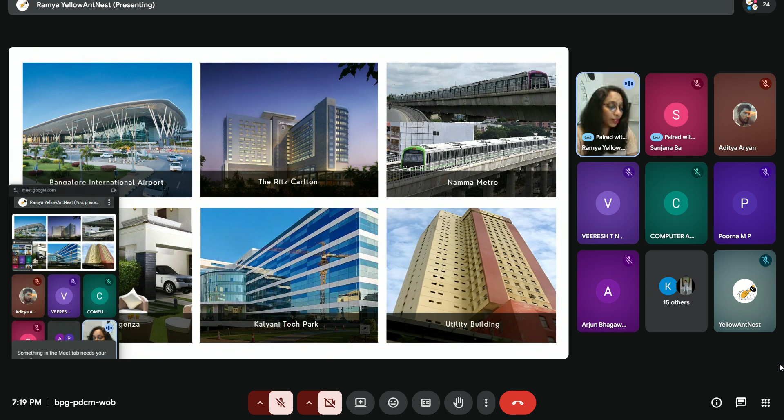Coming to today's workshop, this is mainly about how your drawings can speak more at the site, and also how to produce more professional drawings without errors, making the drawings more understandable for the people using them at the site. That is the main motive of this workshop.

This is the second part of the workshop which we conducted the previous month, in December. We had covered topics like initial drafting settings, where you can do a set of adjustments in AutoCAD which will make your drafting speed very high. Other things covered were how to start with professional floor plans, how to give dimensions in your working drawings, and how to start working on elevation sections and the electrical layout.

Excuse me, ma'am. Yes, tell me. Ma'am, can you close your meeting window? It's on the bottom left. If you can just cancel it, it's overlapping with the presentation. Okay, now. Yes, ma'am. Thank you. One second. Is it clear now? Yes, ma'am. Okay, fine. So the plumbing drawings.

Before we start the plumbing drawings, can I quickly get a few introductions on how many architects or civil engineers are here, so that I can explain in that perspective? Can you unmute and tell me one by one? I am a civil engineer, ma'am. Any architecture students, fresh architects? Ma'am, I am an architecture and interior design student. You are a student? Yeah. Good evening, ma'am. I'm a fresh graduate and I'm working in a firm. Okay, architect, great.

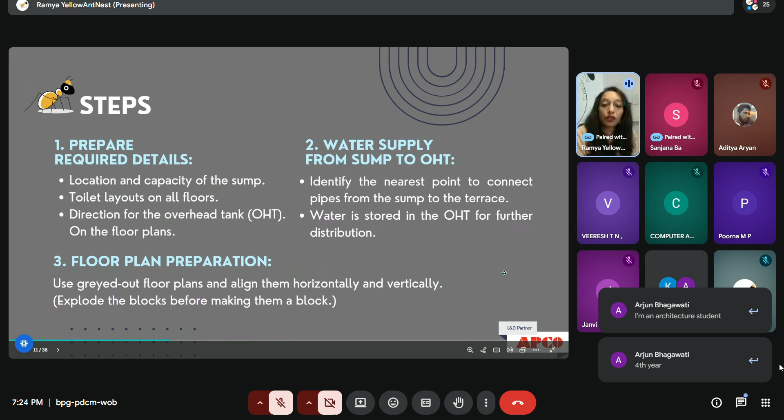Meanwhile, we'll continue with the plumbing layout. In the plumbing layout, the drawing is prepared to tell the workers at the site how to lay the pipes, in which direction, how many inlets and outlets should be provided, where the water has to be taken out, and from where the water has to be taken in to the entire building and individual toilets, kitchen, and utility. We are mainly concentrating on the residential layout right now because that is what we can cover in this workshop.

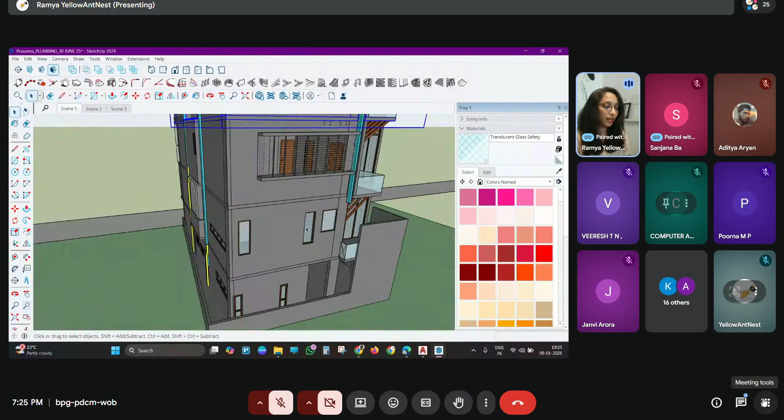So we are taking a small example of this villa. This is a 4 BHK villa, and we have around 4 toilets, one kitchen and utility. As you see here, we have the overhead tank on the last slab, and from here I have to plan the pipes going to all the toilets in the structure. Here I have one toilet, one toilet here, the kitchen in this corner, and here I have the utility. In the ground floor I have two toilets.

Based on this, you have to divide your outlets from your water tanks. To get the water to your house, you have to see where you have the water connection from your main road, where you can take the water inside with the water meter.

Any questions, guys? Meenal, you have unmuted. Do you have anything to ask, Meenal? Hello?

Okay. So after you take the water to your overhead tank, from there you have to distribute it and take the water down in all directions. Usually when you plan, people provide toilets one above the other because of this reason. Here in the basement you will have a sump, and there is a small thumb rule for locating the sump: it shouldn't be very close to your column or the column foundation. Keep it at least 1.5 feet away from the columns, and it can come under the parking or sometimes under the bedroom also.

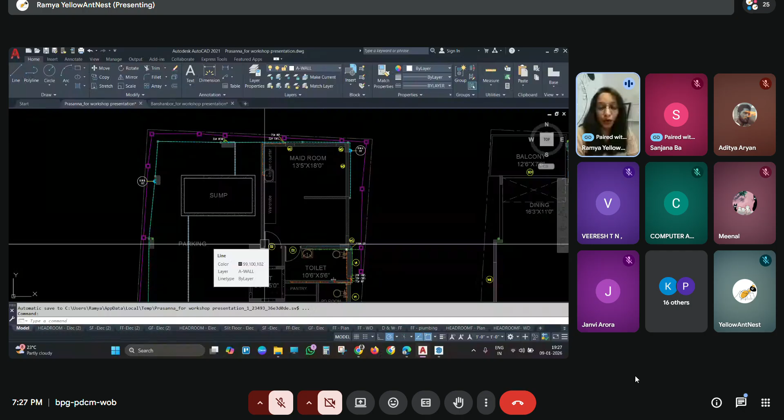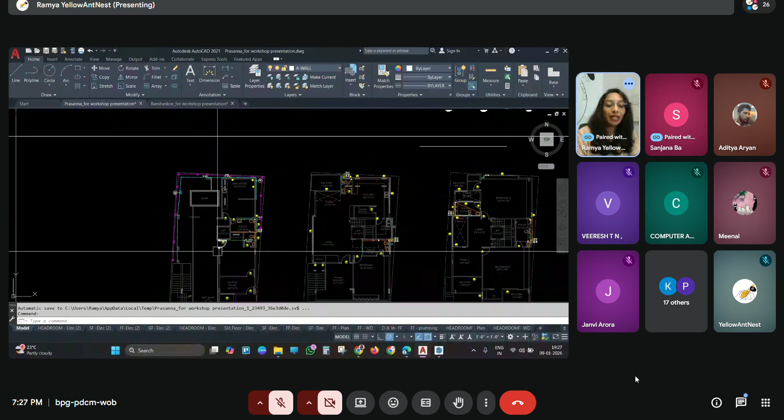The pipelines go below the plinth, so you need not worry about what activities are coming here. According to that, you can plan your sump location. The only thing is that it shouldn't be very close to any column foundation. From here, you can decide in which direction you want to take the water to your overhead tank. From the sump it comes directly here. At the overhead tank, here we have two water tanks.

One is for the regular storage and one is for the solar. So what we have decided is, from here, we have to show the arrows in which direction the water actually flows. So behind the column, we have made a provision from where the water is pulled on to the top last slab. So it will come here, then we have taken bends and it reaches your overhead tank.

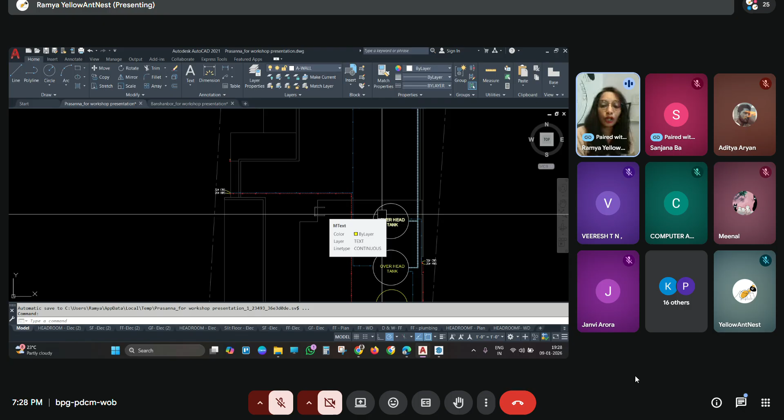So people also decide on the location of overhead tanks as per Vastu, that is usually towards southwest. So towards the southwest, they keep the water tanks, and they provide the distribution from that location, and as per Vastu that should be the highest location also, so that will also help you to distribute from there to all other locations, all other rooms, that is toilets, kitchen, everything. So from here, it is again divided.

So before you come to the 2D drawing, what we would recommend is to start with the small rectangular blocks and decide where all you need the pipelines that have to come to your toilets. So for example, you have the pipe running here, and if you have any disturbance, like a column, a beam, or a window coming there, what you will have to do is take a small deviation, and then you can continue taking the water down. So this will help you to locate exactly in that particular floor where the pipe location has to be provided.

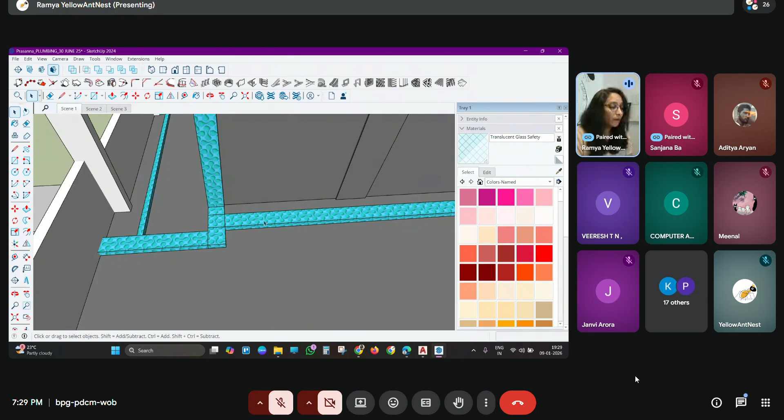So once you complete this, how you are distributing. So for example, if you have the water outlets in two directions, they use the T joinery to distribute the water, and according to that, the inflow will be decided. So for this particular toilet, we are taking the water inside from here in this location. So as per this, you will update your floor plans showing where your water inlets are starting from.

It is a little stuck.

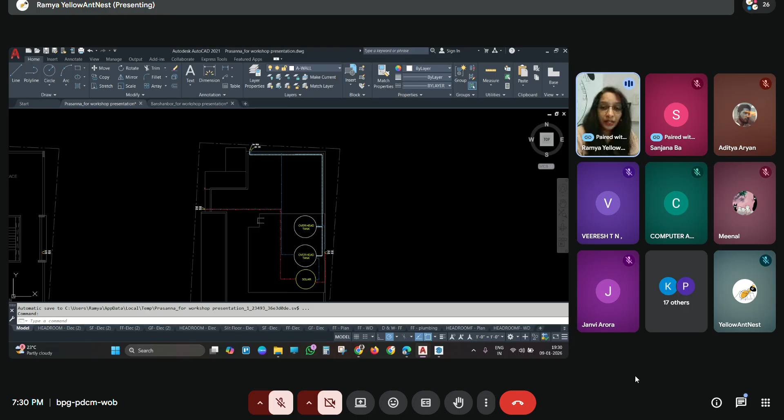So after you decide that, you can start with layouts in the toilet. That is, where your water heaters are coming, where your WC, where your wash basins are coming, where the shower heads have to be placed. So plan your shower heads, WC, and all these things in the toilet. And then once you get the points where the pipes are coming, according to that, you can show from where the pipes have to be taken inside. So this blue color represents the cold water distribution, and this red color with HW represents the hot water distribution.

So the first step is taking the water inside the plot. Wherever you have the nearby water connection, from there you are going to draw the lines into your sump tank, and from there you will show the water flowing upwards towards the overhead tank. From there you are again distributing the water downwards to the toilets, kitchen, and utility. And here you are going to show each connection going to all the fixtures in the toilet. It can be a tap, WC, health faucet, the wash basin, water heaters. So for all these fixtures, you have to show the points and the pipes running individually.

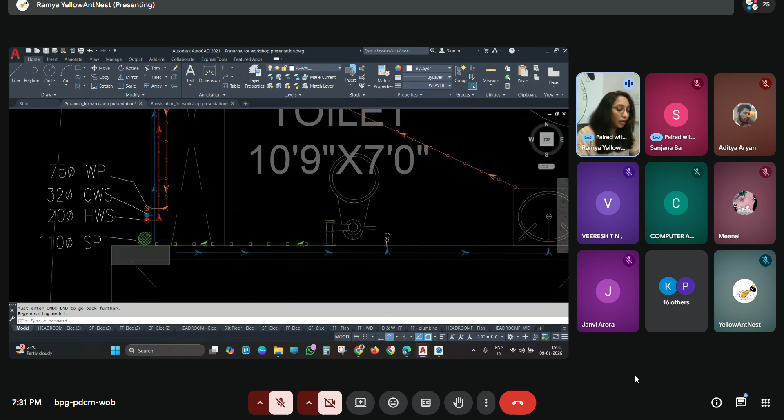And from here, again, you have to decide how the wastewater is taken out of the construction. So the first point is to decide where your nahani traps are going to come. The best recommendation is to give the nahani trap right next to your shower head and your WC, because you're not letting the water flow a long distance before you drain it. So it is always best to provide your drains close to the shower heads, or where spillage of water is possible. So in those places it is recommended to provide the nahani traps.

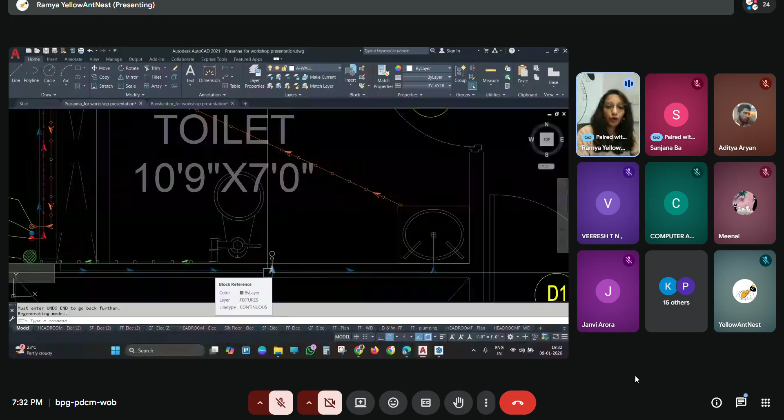People generally go for a maximum of two in one toilet. Otherwise it can be kept at just one location, where your wash basin water outlet is also connected directly to your nahani trap. So how you are going to distribute all these internal lines: one option is you can take all the pipes running below the slab and cover it with the false ceiling, UPVC or the PVC false ceiling, which is available in the market right now.

Or you can actually raise the slab or take a sunken slab and lay all your pipes. And as you see here, this cross pipe is going below the slab. I mean, we have taken a sunken slab. Just above the slab you are going to place the piping, and you are going to fill it with cinder and then do your flooring.

The only difference is that when you take the pipelines below the slab, it will help you with further maintenance. It will be very easy for you. When it is covered with a false ceiling, they will open a small panel in between, and they can do the required repairs or the connections. If there is any small water leakage, it will be very easy for maintenance.

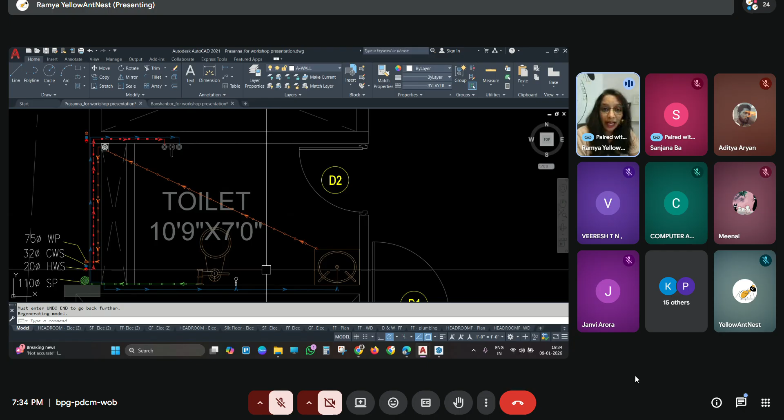But if you are going to place these pipes inside the flooring, fill it up with cinder, and after that cover it with the tiles, then if there is any leakage, maybe after 10 to 15 years it will start showing up in your walls, in your doors. The walls become damp, the water droplets will damage all the paint, and the tiles can start showing cracks. The flooring and walls remain wet during the rainy season. Even in summer, if the leakage is high, it doesn't dry at all.

So the maintenance becomes very high if you go for the sunken slab system, which has been followed for many years in the industry, but now it is not really recommended if you are looking for longer durability of the structure. So it is always recommended to take your pipes, do a core cutting in the slab, and put the nahani trap. Below the slab, you can start connecting all the pipes, and in one go you can take the pipe outside.

If you do not prefer to go for core cutting, you can give a dummy pipe before you pour the concrete when you are laying the slab. If you have all the drawings ready, prepare one dummy pipe filled with a brick or a cloth or something, place it where you want to take the water outside, and then pour the concrete. Once the concrete is set, this opening will be used to run all your pipes, and then it will be sealed with concrete or with waterproofing elements. It becomes very easy to run the pipes, especially when you have beams and slab there.

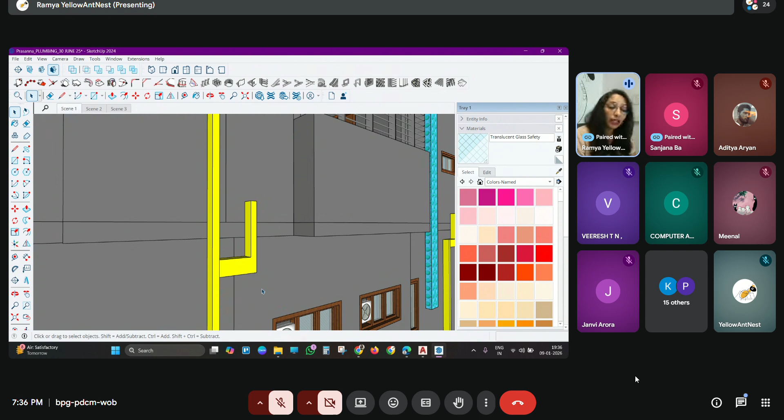The only thing is, during the design stage, you have to make sure these are maintained. If you have a toilet coming above the dining or a foyer, since designers usually do not strictly follow that a toilet has to come above a toilet, you can cover it up with a false ceiling or other design elements, which can be opened for repair work and then closed again. So this is one option.

Once you lay all your pipes, you are going to show how the water is flowing outside. For example, in this toilet, we are getting cold water to the wash basin, to the WC here, and the shower head here. Through this drain, your soil water is taken out. The orange line shows the water flow, along with the dia of the pipe. For solid waste, green or yellow lines are shown in plumbing drawings in general. These are taken down, and in the ground floor you show the manholes at every 20 feet.

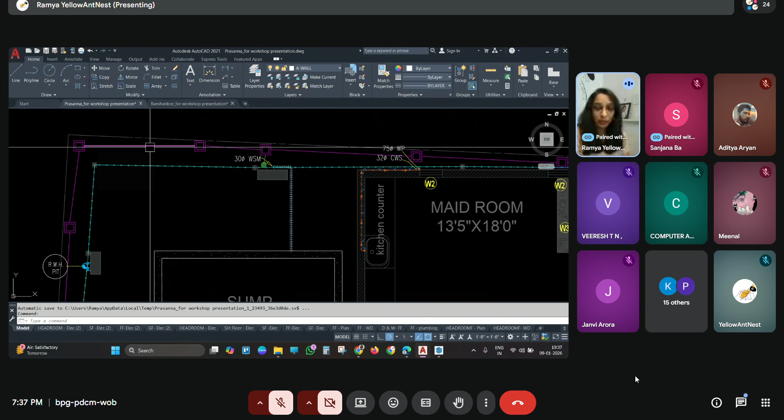For example, if you have a manhole here, consider a minimum of 10 feet in both directions, and altogether it comes to 20 feet. It is preferred to give 20 feet of distance between your manholes. If you are concerned about having these manholes all around the structure, plan your toilets on one side of the building, which is a little difficult, but with limited requirements it is 100% possible. So check that and plan during the design. Consider these points, which will make your services much easier.

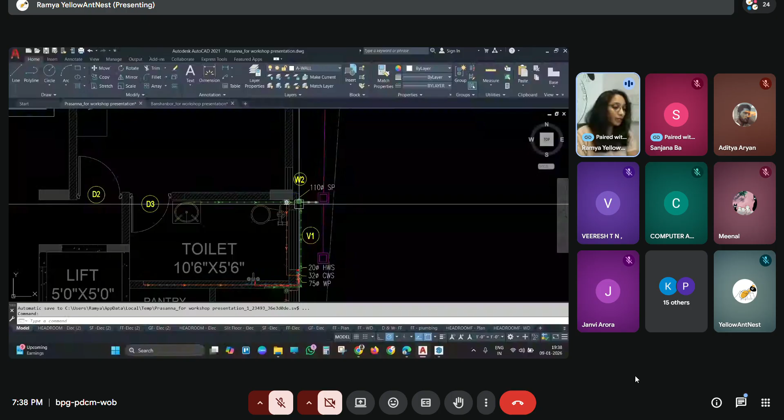So as you see here, I have taken all the points. So for example, I'll show you one. So here I have this point, I have the soil waste pipe, this is the liquid waste, this is cold water inlet and hot water inlet. I'm going to copy this, take a common point here and paste it here. So this will tell you exactly where it is coming. So it is coming in this location in the same place.

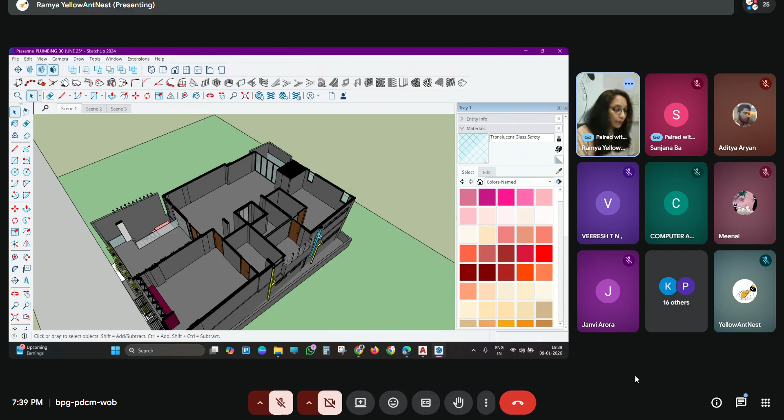But if you are shifting in any of the floor plans, I would recommend you to take a section in this, take a section and then you can export it. You can export it, and here you will know exactly where your outlets are coming. So according to this reference, you can use in all the floors and show where the water is taken inside and outside.

So we'll quickly refer our, so as I told you, the location and the capacity of the sump depending on number of people, or depending on number of residents, or the location where you have water scarcity, then you will have to go for more storage. If you do not need so much of storage, then you might not need a bigger sump tank.

And even in building a sump tank, you have two to three types of sump tanks which you can go for. One is the ready to install sumps, the second one is the RCC, the reinforced sumps. So depending on the site location, you can give these options to your clients. And then is to identify the nearest point from where you can connect this sump tank to your overhead tank, and from there how it is distributed.

So we discussed this, and these are the few things which you will have to remember. That is the hot water, we can usually go for 3/4 inch or 1 inch. These days if you are using a pressure pump or a heat pump, we would recommend to go for 1 inch for both hot water and cold water. Wastewater can go up to like 2.5 to 3 inches, and sewage water compulsory you will have to go for 6 inches.

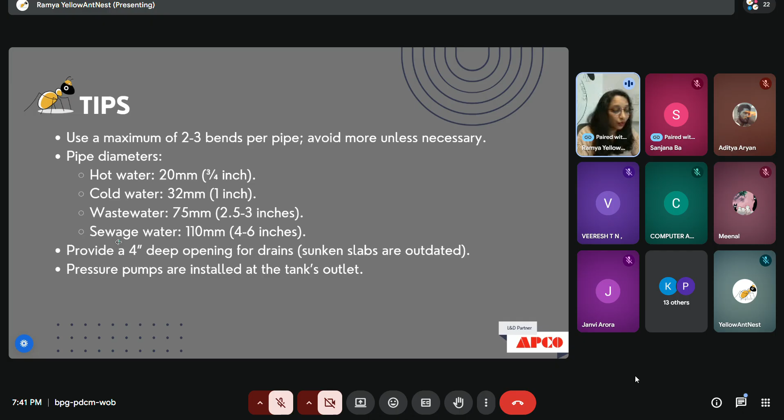Any questions here? If you have any questions, you can ask.

Some wastewater pipe also in every bathroom? Wastewater pipe we have to provide in every toilet? The wastewater pipe, sorry, come again. Wastewater pipe has to be provided in every toilet, yes. Okay. Because you will have the nahani traps, you will have the solid waste in all. So you will have to provide the wastewater in kitchen and utility also. So wherever you are taking the water inside, everywhere you have to give the outlet.

Okay. Any other questions? Was it clear? Yes, ma'am. Okay, thank you.

So we'll go to the next topic, that is the door window details. So as we discussed in the last workshop, whoever has attended, we had recommended to create this kind of a block where it will help you to understand what are the heights of individual floors. If you're following with the same height in all the floors, it will not be a huge challenge. But if you're playing with different levels, you might feel very confused at what height your windows are coming or what is the maximum height of doors you can go for.

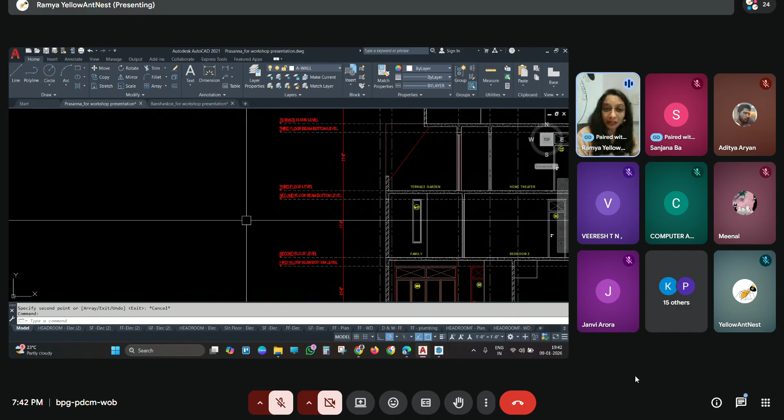So what we recommend is to start with the floor level. So from the floor level to whichever floor you are starting with, you have to find out what is the ceiling height, what is the beam height, and the thickness of your slab. So fix these heights. So then you can start with providing at what height you want to provide the windows.

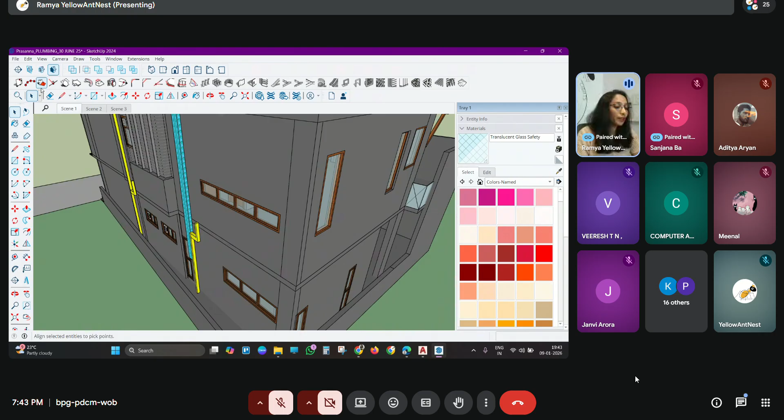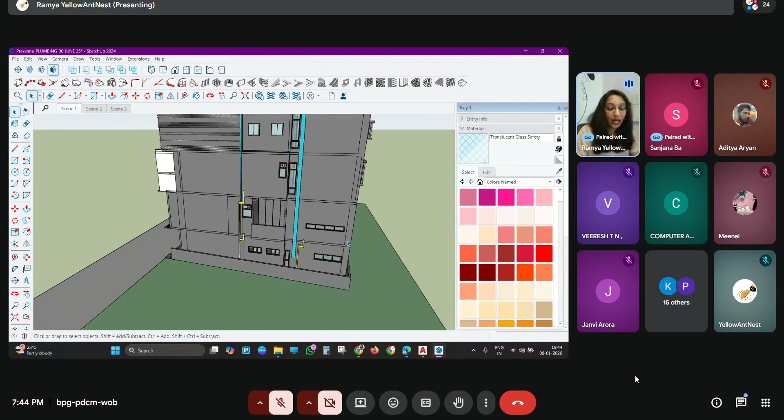So generally, as you see, depending on the room function or maybe depending on what kind of elevation you want to create, these windows are designed. Especially if you are planning with few complex solids, or if you are trying out different shapes, then understanding where the beam height is coming, or what should be the maximum width of the window, how much space is left. So what procedure we follow is complete all the window designs on your model first, and then you can take your floor plans, or take your windows and doors and start working on the detailed drawings.

So what we have done is, according to the elevation and the functionality, we usually provide a minimum of two windows in the bedrooms and one good big window in the toilet and living room, depending on what kind of theme our clients are looking for. According to that, we decide if we have to provide bigger windows, one big window, or smaller different windows.

So you decide how many types of windows you want to provide, and once you finalize everything in your 3D, then you have to start with each floor and name the windows in the working drawing first. Start with naming the windows, then start with the doors first, and then continue with the windows. So this is the ground floor window detail which you are looking at. Here we have started with the sliding doors. I'm showing the frame of the window.

So the important thing required at the construction site is to tell them what should be the width and the depth of the frames that you are going to use in the windows. For example, you can go for 5 by 3. If you're going for wooden windows especially, the client will be concerned about the span, how big the maximum span of the windows can go, up to 12 to 13 feet. More than that, if you provide wooden windows, there are chances that it bends over a period of time and your shutters might not sit properly.

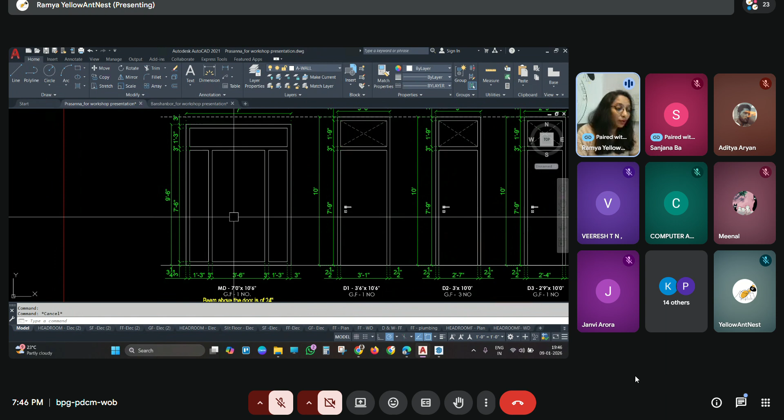So because of that, you have to give additional mullions or more dividers to reduce the span. All your creativity will come into picture here. So here you have to decide if the span is bigger. If you have a really huge window, you can go up to 5 by 7, 4 by 5. These are the common sizes you can get in the market for any wood.

If you're going for UPVC, then depending on the span, they can suggest the window frame size, or you can also ask saying that you're looking for sleeker windows where you want to display more glass and less border. If you have small windows, it is always better to go for the sleeker frame.

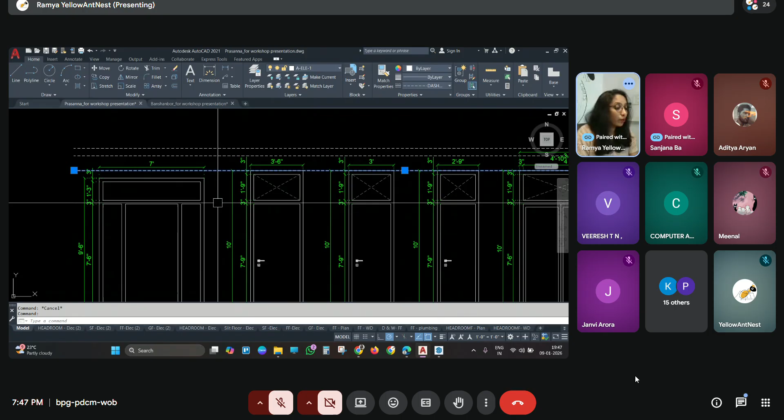So here you can start with showing till what height you want the window. I know the maximum height I can go is till the beam bottom height. So as soon as I start with the window drawing, I can decide the maximum height of any doors. The standard height we are going to take is a 7 to 7.5 feet opening. After that, you can make it a fixed glass, or you can keep the doors to only 7 feet. It depends on your design.

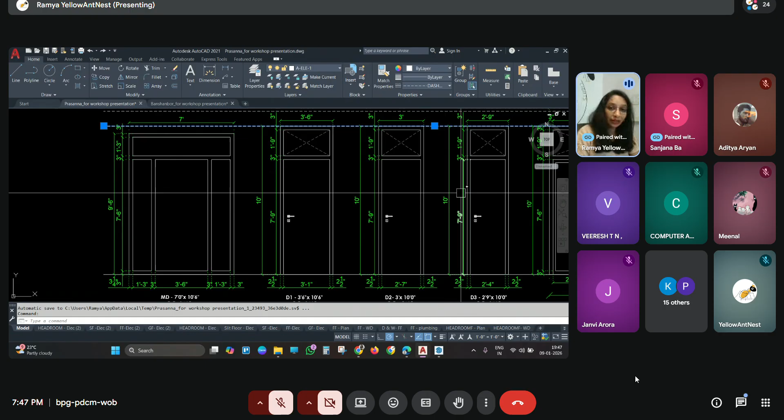After you provide all the drawings of the doors and windows, you have to start providing the dimensions of each frame and the mullions. Once you complete that, show the fixed glass or on which side the door has to open. For example, here if it is a sliding window, I will show the drawing with the arrow. This will represent a sliding door. And if it is a flush door, you can show which direction it has to open. This will represent a flush door.

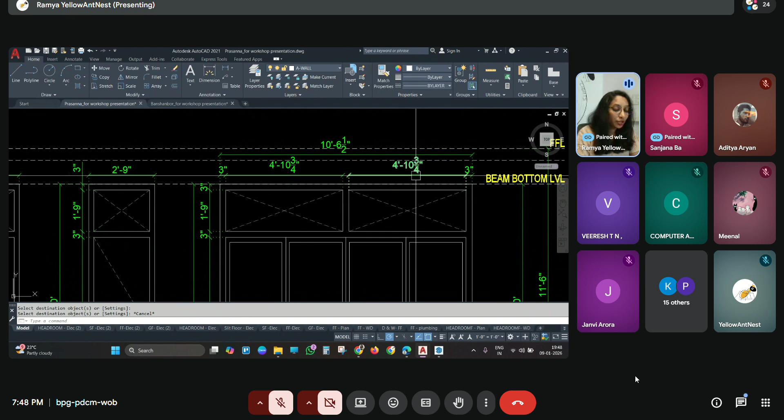Along with this, you have to show the complete end-to-end dimension, the complete width of the opening after the brick wall and plastering. That will become the entire span. Then your window frames will come into picture, and then your shutter frames. So you have to show individual divisions. For example, if you are giving 3 divisions or 2 divisions, mark them with the approximate dimensions you are going to create.

For the height, the main things you have to show are the sill height, window height, and the divisions you're going to give. If you're going for any special window, like a corner window, you will have to show the floor plan showing on which side it has to open and how much extrusion you have to take out of the window. For example, for a bay window, what should be the depth of the window after which you are going to place the window frames. To represent that, you will have to show the floor plan.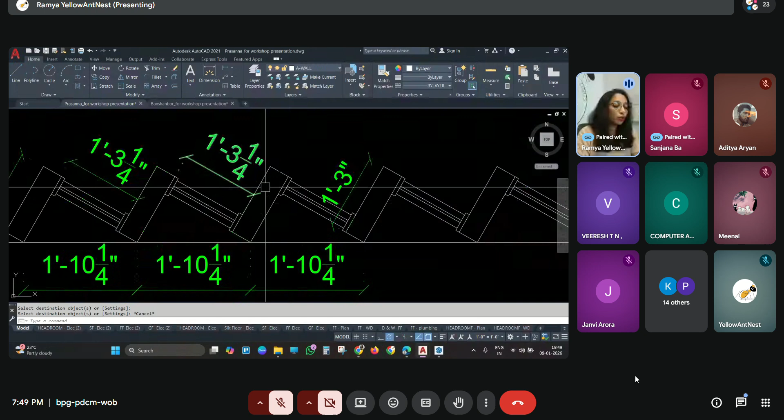So we have a solid plank. In between, we are going to place the frame where you can access, open or shut the window.

So these are the few things which you will have to consider: the sill height, the window height. You understand what is the sill height, right? From the floor level, how much height the window has to be placed - that becomes the sill height.

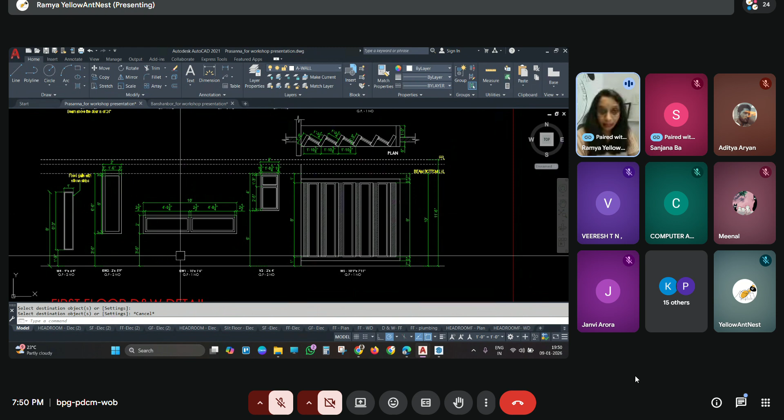Usually people prefer to have the lintel height, above that it will be completely covered. If you have to show a lintel, you can show it - usually lintel height will be provided at 7 feet or 8 feet. So here you can mention as lintel level, and all your windows will stop here at the lintel height. If you prefer to give additional windows above the lintel, you can show it from the lintel level also.

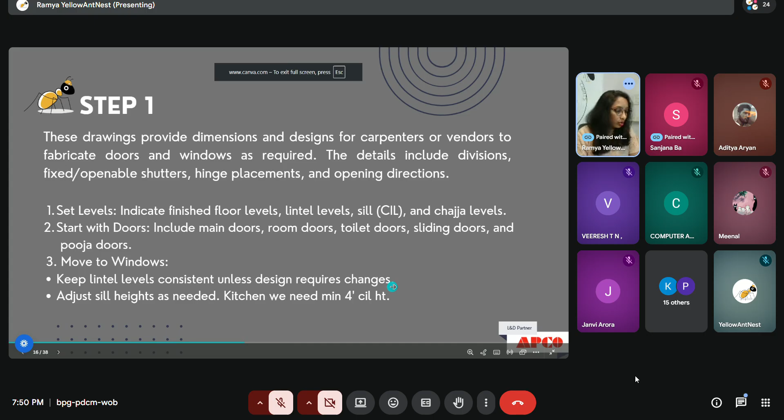So that is about creating the doors and window drawings. These are the few sizes which are available in the market, which I have mentioned. So that is about door window detail and the plumbing detail.

Any questions here? If you have any questions, please don't hesitate to ask. No questions? Anybody?

Okay, so we'll go for the staircase drawing. Staircase drawing is also very simple. One thing what we follow is to create the staircase in the first.

Okay, thank you, Anna. Yes.

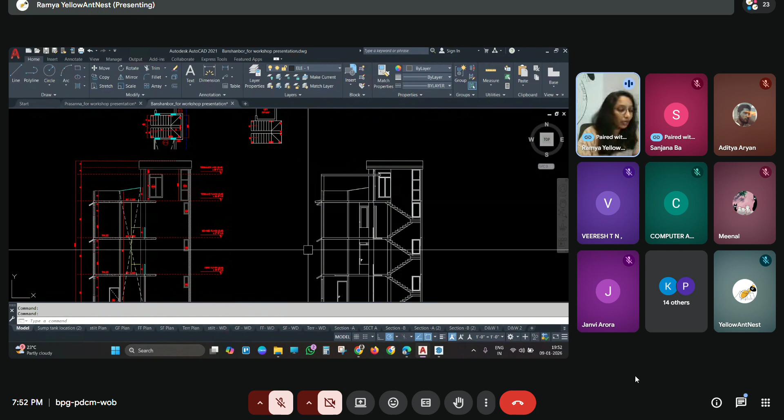So the procedure what we follow in our firm is that once we complete our 3D and fix all the heights at what level your ceiling heights are coming, we'll create a block which will be used for all the elevations. So here as I show, this is the block which we use for all the elevation sections. Similarly, we will be using that for the staircase detail also.

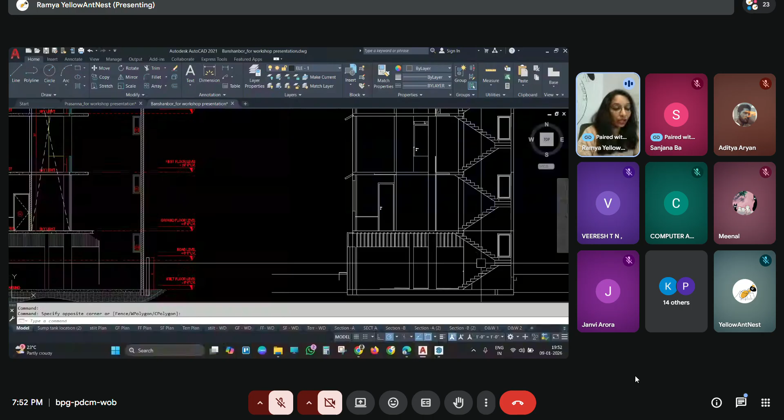So in the staircase detail, the important things that has to be shown are the riser height, tread width, and what kind of staircase you are going to choose - is it a chain slab or a base slab staircase, or where the windows are providing, where the windows are coming for your staircase.

So draw a section along with the staircase where you want to take it. According to that, here is the section we have almost completed, where only the staircase is missing. So what we generally do once we export, we use a polyline and take the outer heights of the staircase. It depends on how much detail you want to provide.

If you are creating any featured staircase where you want to use MS sections or wooden planks in your staircase, then the staircase detailing should be much higher.

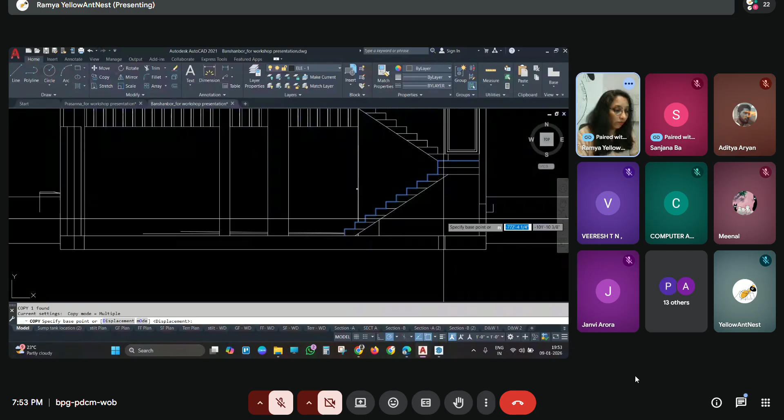So I'm going to take this one floor, I'm going to show it. So this is the flooring height, I'm going to place it here. So if it is a chain staircase, I'm going to consider the chain staircase here. I'm just giving an offset.

So wherever you are taking this section, only there you will have to show the cut section with the different hatch. So in this you will have to show the stone laying or the tiles. So I'm going to show the stone - so this will become this stone here.

Okay, so the same detail we have to continue for all the steps.

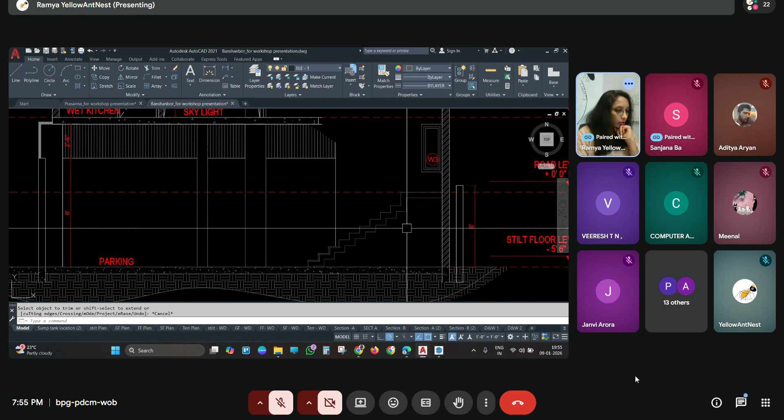So one side it will become - for example, here I'm taking the section where you see, so this part I'm considering as a section and this part will go in the elevation part. So here what I will do is...

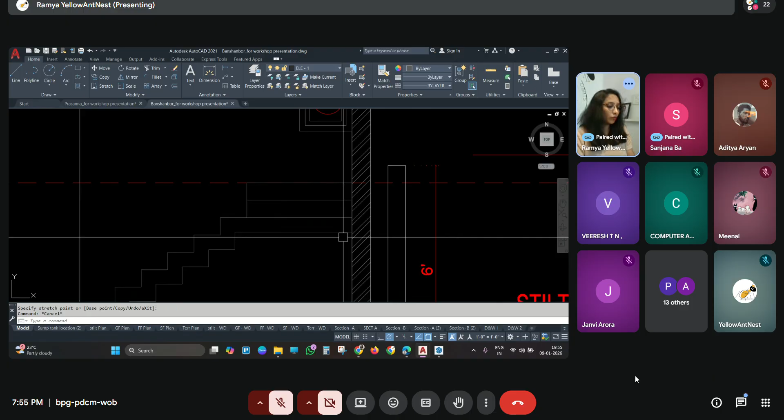So these steps will come into elevation and this part will be on your sectional line. So here again, I'm using the same height and the width to take it for the next floor.

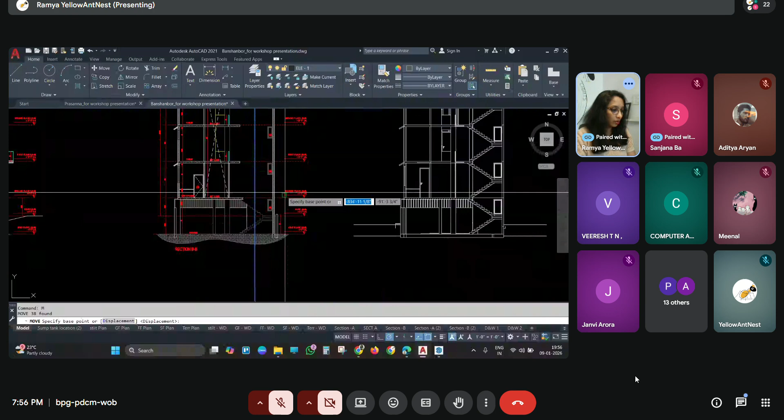So to cross check this, you will need to have the floor plan here. So our landing is ending at this place. I'll just move this. So this is the landing width, as you see here. This is the landing width and your cross step which you are seeing is seen in the elevation at this height.

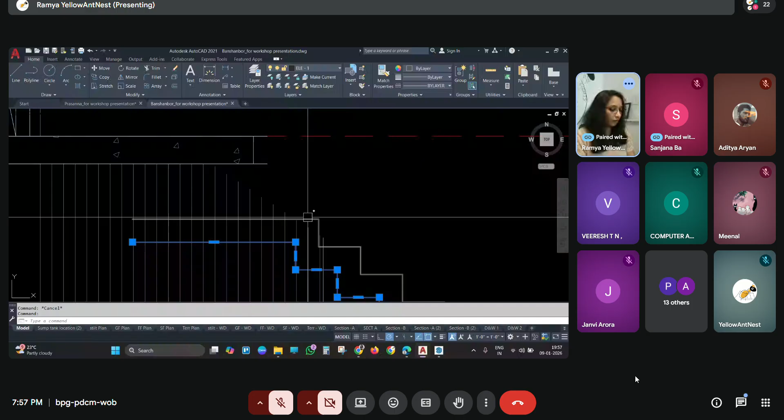So after you provide this, I'm taking the thickness of the staircase to be 5 inches. It has to end at the same place.

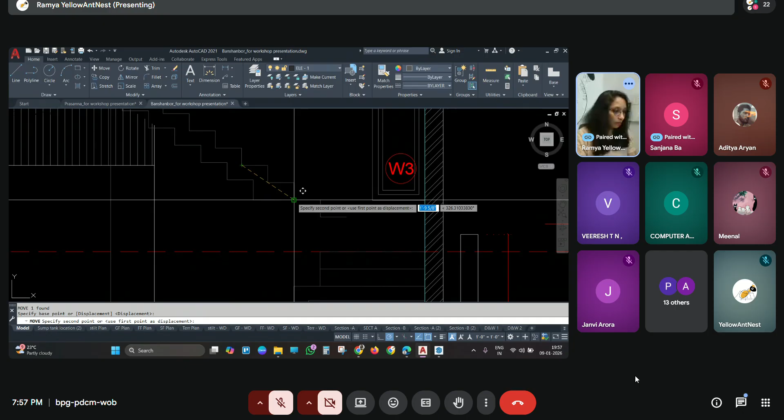It will go for the further height. So calculating how many number of risers you need, you can decide on planning this. So once you finalize on number of risers, you will get the exact height.

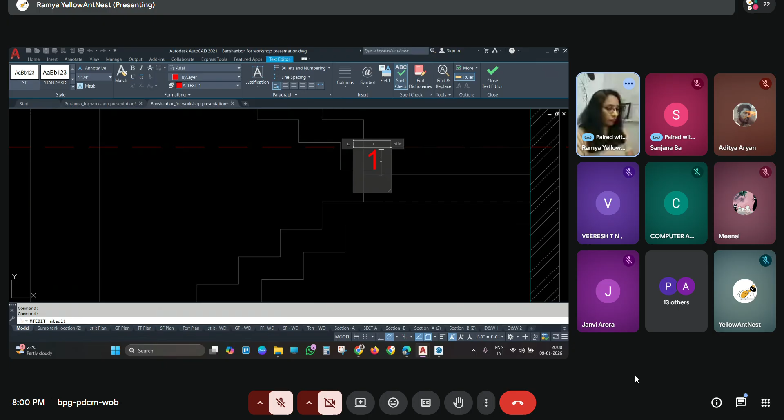Okay, so once you do all this detailing, you can start with numbering the staircase. Just provide the starting number at the landing, and at the starting of the landing again. So for the entire height till you reach your headroom, you need to provide the numbers.

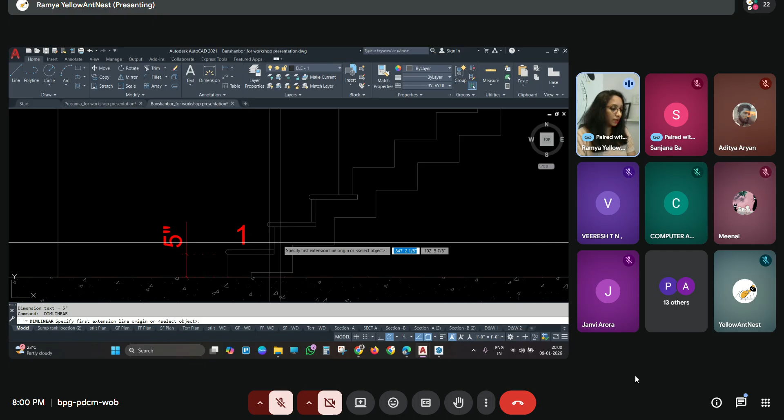Then you have to show the height, that is one is the riser. Show it in two places, or you can mention this in the text also. And the tread, this you call it as a tread. So 9 by 6 is the standard tread and height we use for the staircase design. That depends, you can increase or decrease this also. Some people prefer to use 6.5 by 10 inches or 7 inches by 5 inches.

So it depends on space available and also the preference of the clients. So you can find out, or you can use your experience to decide, but you can still go for the standard, that is to be on a safer side.

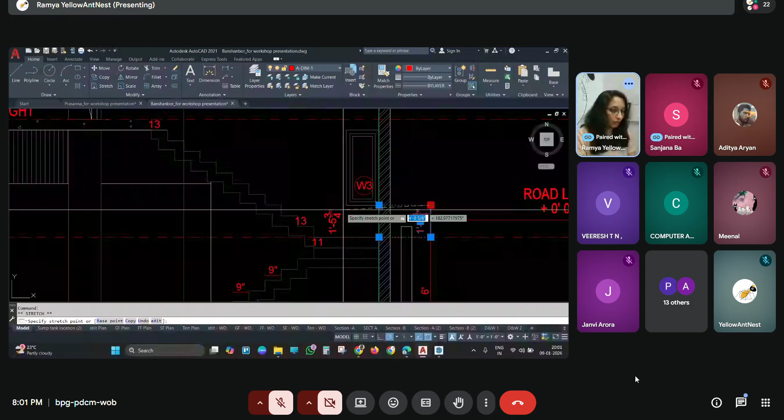So from there you can show at what height the windows are coming, and what height the landing should be provided. So these are the important things which you have to show in your staircase detail section. You have to show the landing height and the window sill height, and in the floor plan, it is compulsory that you show the width of the flight.

So for example, here we have around 10 steps, 9 to 10 steps. To cover this 9 steps, what is the width space that you require at the site? So to understand this, width is important, and the landing dimensions. So keep the landing dimensions same, that is the standard we have to follow.

And in between the staircase, if you prefer to give and there is a space available, I would always recommend to give the space in between the staircase, so that your railing or the railing designs come out really well and your railing will not eat up the space in the staircase.

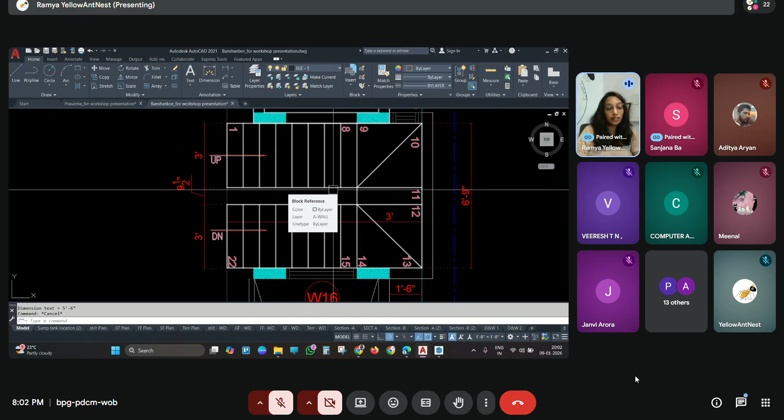So just like any other section, you will be preparing the staircase section also, but you will add additional details to the staircase, and you can mention what is the material you are going to use. For example, if you are using granite or tile, you can mention that. Or if you are going for the MS section staircase with a wooden plank, or if you are going for a cantilevered staircase, decide on what kind of staircase suits the best for your design, and then you can start providing the detail.

Window placement, so that is about the staircase detail. Staircase detail is not that difficult as you think, it is very simple. Only thing is you should know exact heights for your landing and the ceiling height. So once you know this, it will become very easier for you to prepare the staircase detail.

Any questions here? No questions?

We are not able to hear the audio. Sanjana, can you unmute, please? Hello, am I audible? Yes, just a second, I'm sorry for the glitch. Okay. Is it audible? Yes, it is audible now. Yes.

This company was started by my father in 1973 against a well-established method of putting up buildings. It was... Hello Sanjana, can you play it from the beginning please? The voice is not matching.

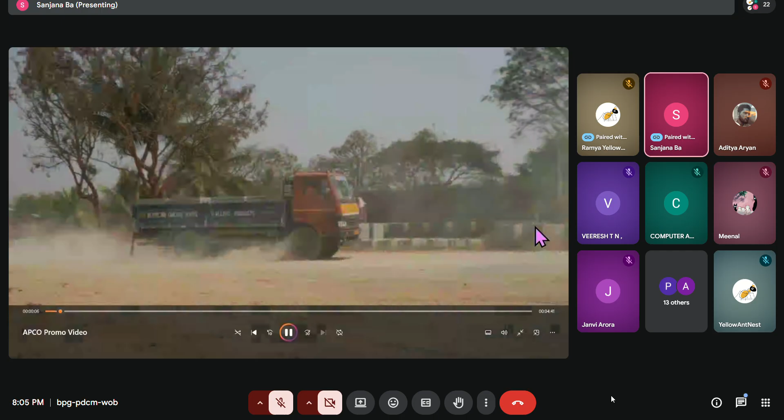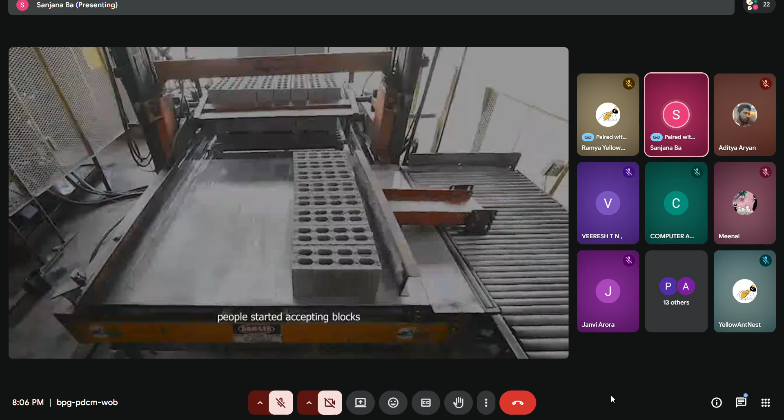This company was started by my father in 1973 against a well-established method of putting up buildings. It was bricks and probably granite all the way in terms of using them for walls for the house. So when that started, there were very few takers for the product, and probably in the first 7 years, just trying to convince people was by itself a huge mountain to climb for him. When I joined him in 1980, probably one or two buildings in 100 attempted to use blocks. However, on account of that persistence and efforts, things started looking up in the future, and one by one, people started accepting blocks as an alternate to bricks simply on account of the convenience of using a faster mode of construction, better quality of the product, and the ease of construction at that point of time.

The concrete product industry is a very, very complex industry. If you stagnate, that's the end. You get left behind. And this is the only reason APCO has remained number one in blocks for all these years.

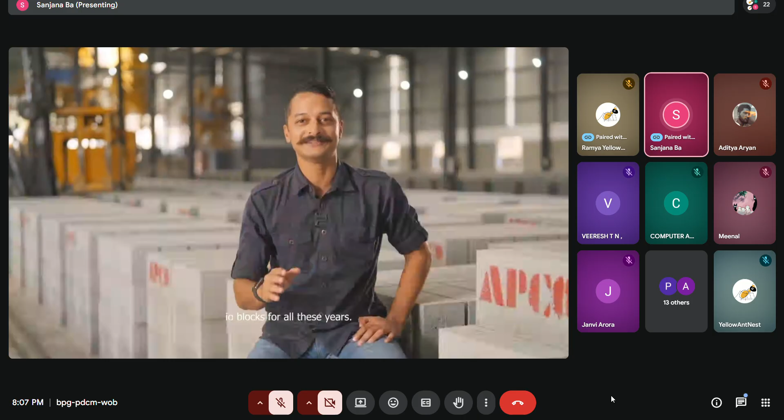We have gone from making blocks the conventional handmade way to having fully automated systems in the last 50 years. APCO has been a household name for the last 50 years. We've been the number one name when it comes to blocks for the last 50 years.

And now APCO's goal and vision for the future is to become the number one name in anything related to building solutions, from pavers to curbstones to whatever is required. And that's the future of APCO.

Every day spent here, it's not just about delivering blocks, it's also delivering excellence to our customers.

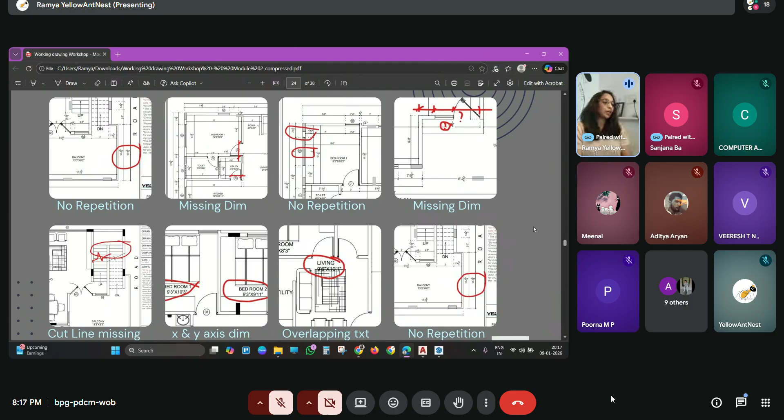So we are going to talk about a few of the errors which we commonly make as freshers or students, which go to the site and look very unprofessional for the person reading it. Try to avoid these things when preparing the drawing, which wasn't an issue when we used to hand draft it. But after switching to AutoCAD or other software, these are the common errors we find, and this shows how experienced, serious, or professional you are about your drawings, as seen at the site by the contractors and engineers who are going to construct or execute your designs. So your drawings become equally important at the site, because without these you cannot tell a person how to execute your designs. Drawings are the language you use to get your designs into shape.

So these are the common mistakes we have come across over a period of time, where we take up architects' projects, do the QC, and then upload it on the website. We see these common errors done by students and also architects, which cannot be accepted at the site.

One is the repetition of dimensions. If you have already provided one dimension in a room, wall, or column, do not repeat this, whether it's right next to each other or in any other location. Once you give the dimensions, keep it limited to one time.

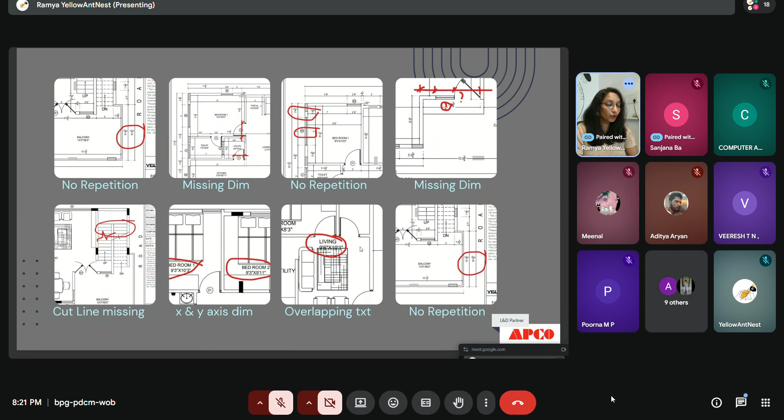And then the cut lines in the staircase, and always follow the x axis and y axis. When you provide a dimension of a room in the text, always pick the width of the room as per your drawing. What is the x dimension of the room, and then go for the y dimension. And also avoid these overlapping, because even for you, if you have to confirm the dimensions you have given in the text, when you take the printout, you will not be able to read the numbers you have given there. So try to avoid this also.

Yeah. And next is the door names. So sometimes you might miss the door names or you might miss the window names. Try to avoid that. The dotted lines have to be shown only for the ventilators, because the plans are actually drawn when you cut a building a little above the floor level, that is at 3.5 to 4 feet. So only then you can show the windows with the continuous line and not the dotted lines, because we are not cutting the model or the building or a structure at a ventilator height.

We are not going to show the ventilators in a full continuous line. As you see in many offices, they show windows and the ventilators in a dotted line. So if you provide the dotted lines, it means that your cut line for the floor plan is something different from what the standard follows. Okay, so only the ventilators have to be shown.

If any of your windows is also coming at a height the same as the ventilator or above 5 feet or 6 feet, then you have to show this also with the dotted line. So not only the ventilator, any window that is placed above 5 feet, where the sill height is more than 5 feet, you will have to show in a dotted line again.

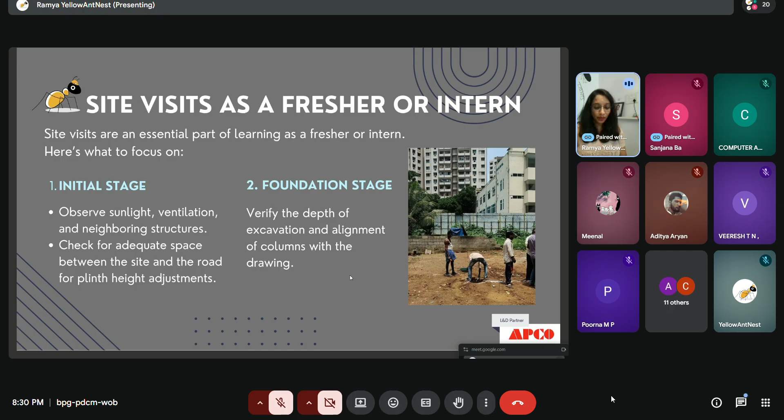So that is one, the alignment of the column. If it is vertical, the foundation is also planned for a vertical execution of column. And yeah, that is two things that you have to start during the construction.

After that is the levels. Most of the times whatever the level you have provided in the drawing might not be understood by the contractor. If the contractors are especially coming from the client side, you might have given 1 feet from the floor level, 1 feet from the road level, and they might have started the plinth with 2.5 feet. So what happens, for all your elevations you will have to give additional stairs, additional ramps, and the entire elevation gets spoiled there. So make sure your heights of the plinth match your drawing. It shouldn't go too high or too low.

So when they have provided the reinforcement, that is the reason why architects visit site before they pour the concrete, after the reinforcement is done. So if there are any mistakes and they have to make any correction, they will have the option to make the changes and get the heights in a proper place. So that is the reason you need to visit before they pour the concrete.

And the finishing of the concrete: sometimes if they are not using the machinery to give the proper vibration in the columns, the distribution of aggregates inside the cement might not be to the fullest. So what happens, all the aggregate sits at the bottom, or maybe only the cement is seen on the top, it is not mixed. So on the surface you can understand the quality of the construction. Too many stones visible on the outside is a problem, and if you see only the cement on the top or the aggregates on the bottom, that is also a problem.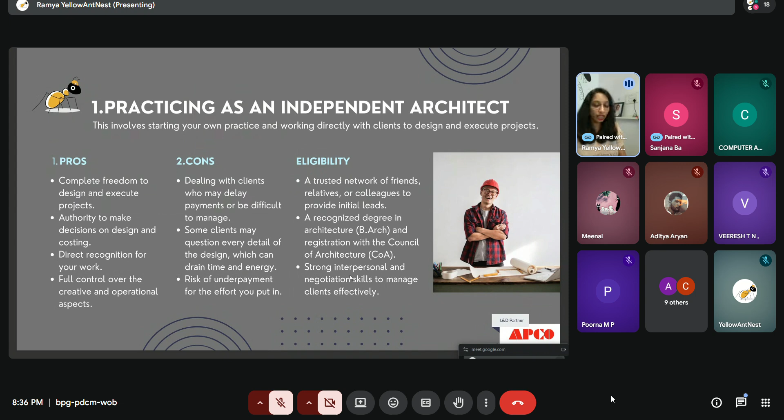For eligibility, you should have a very good network and very good communication skills, where you can talk to people and close deals; closing deals becomes very important. And if you want to practice in India, it is compulsory that you have a degree and a license to call yourself an architect. And yes, negotiation skills, which I told you about just now.

The second one is working with small architecture firms, and many students especially pick this option to learn and get more exposure to the construction industry. Here you also have a few drawbacks if you want to keep working in small architecture firms for a lifetime. The plus point is that you get very good exposure to the complete life cycle of construction. You will be able to see from scratch till the building takes shape, and you will understand the materials going into the construction, the costing, and the methodology or technique the architect is using.

You will understand all of these things, and you will also get an opportunity to learn from a single person and understand the challenges and the process, especially how the drawings are made and how the construction and execution work. You will get to understand this very closely when you work in a smaller firm.

The disadvantages are that the salaries you're looking for might be limited, and the dependency will be more. You will have to depend on your principal architect or the senior architects to approve your designs. So your creativity will be limited when you cannot see your designs taking shape. Unless you are really lucky, you won't get to do the designing in the initial stages of your architecture career. And at least for now, architecture office working hours are really long.

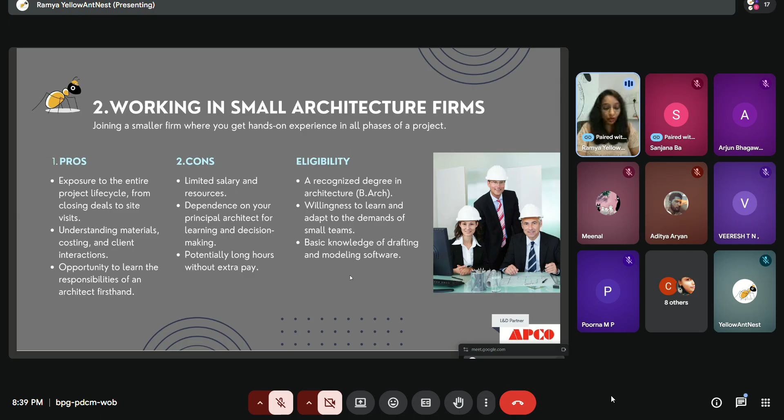The other one is corporate architecture firms. There are many firms in India which support international architectural firms and huge constructions happening around the world, where the drafting, designing, working drawing production and renders, everything in the office is done here, and then it is taken to the site, which can be in India or outside India too. In corporate firms, the bigger firms, a very small part of your work can be seen in a very huge project.

The pros here are that you can get very good salaries, and your working hours, lifestyle, work-life balance and the exposure you get will match any other corporate field available right now. You will get to work on very good software and high-end gadgets, and you will also have really good teams. They will also look after your stress levels and your health. You get many other benefits from the company, and you will have a very defined career growth.

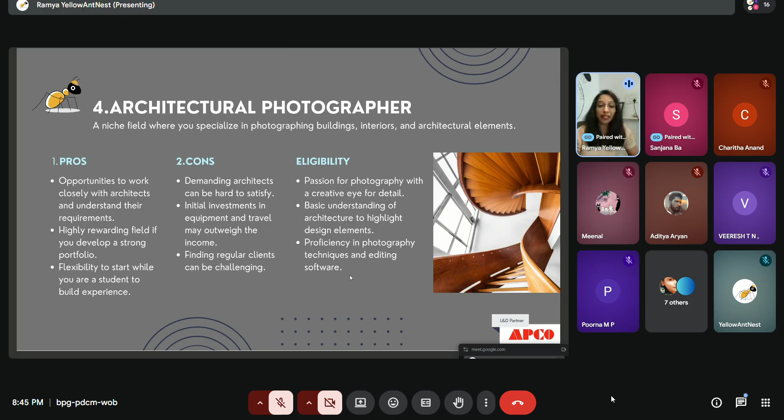So the eligibility is, one, being passionate about photography and understanding architecture, the angles, perspectives. So if you have a really good understanding, this will be the best career growth for you. And again, after you click the pictures, you need to know additional softwares where you do the editing, where you understand the lighting, where you do small editing of the videos or the pictures. So these are additional knowledge that you need to have to continue in this path.

Next one is architecture journalism. You might have seen few students take up architecture photography. Architecture journalism has completely become an elite profession, where hardly people are coming into this platform, and it is very much in demand. There are many magazines, many platforms in India especially, which require people to share their knowledge, share their writing skills. So here the advantage is that, as I told you, very less competition. Hardly you can see any competition here.

And you become a kind of bridge between the common man and architects. As you know, there is very less awareness about architects and the architecture field. The importance of having an architect in the project itself is required to be shared among common people. So this becomes kind of a responsibility if you are coming into the field.

So you make architecture into simple words, simplify the industry, make them understand, make them interesting. So this can be a very creative job, especially if you are into writing and you enjoy writing. So this will also help in educating society about the importance, as I said.

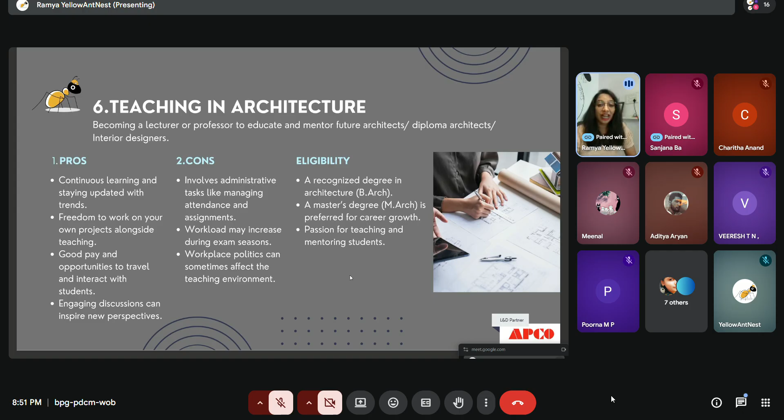So eligibility is one thing. For a diploma or small institutions, the B.Arch degree will be sufficient. But if you want to teach in architecture colleges, an M.Arch degree is compulsory, or you should have a minimum of 7 to 8 years of experience to come into this teaching path. And also the passion for teaching and interacting with students is compulsory. So those are a few things which you can choose if you are an architecture student, or if you have just completed architecture. So that is about it.

If you have any questions. Any questions, guys? Am I audible? No questions? Am I audible? Yes, tell me, Keerthanaa.

Yeah, I just wanted to know in detail about the plumbing, like how the hot water and cold water inlet and outlet works, and also the pipeline for the solar heater. So, can you go into detail on it? Sure, sure, I'll do that. I'll share the screen.

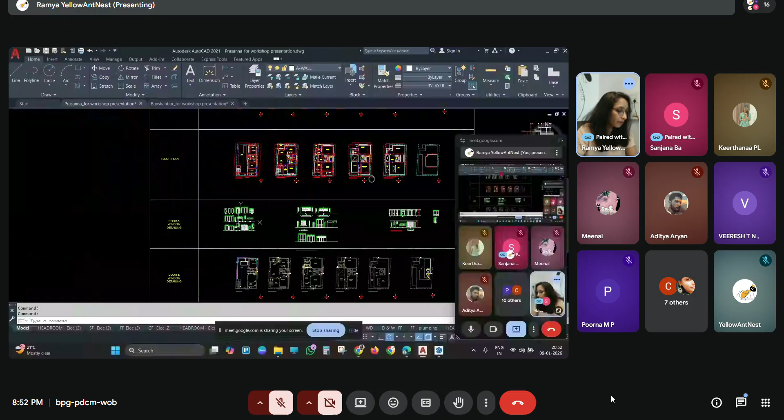As I showed you in the plumbing drawing, from the overhead tank, your water comes from two tanks: the solar water heater tank and the regular overhead tank. The cold water is always from the regular tank, and the hot water, depending on client requirement, comes from the solar tank to the toilets and kitchen as a separate line.

As you see here, it is starting from cold. As you show cold water, similarly you have to show the hot water also. So whichever the starting point from the solar tank, similarly how your cold water pipelines are taken, you have to show the hot water pipes also.

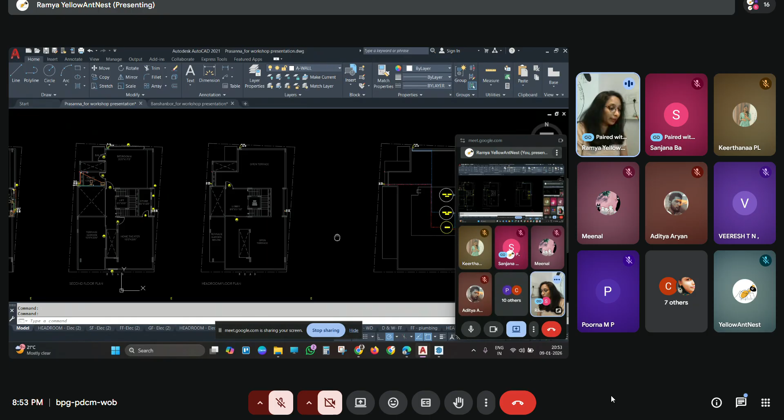For example, here at this floor I am taking all the water at this particular point, and distributing from here. So cold water and hot water, these two pipes go side by side, and the distribution happens - one is to the water heaters or shower heads, and one is for the wash basin and WC.

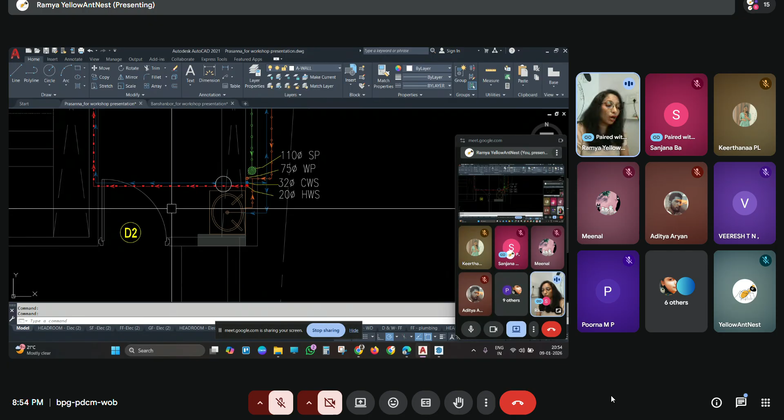If you have the option, some people prefer to have hot water for the wash basins also. But if it is a very good villa, or a prime location apartment, then you will have to show hot water pipelines to the wash basins and the overhead shower. Sometimes people prefer hot water in the kitchen also, so as you show the cold water, right next to it you have to show the hot water also.

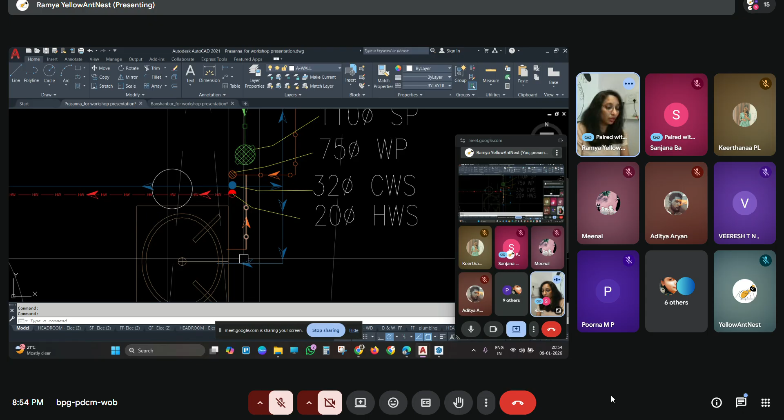Similarly, the outlets are shown in the form of lines - one is the orange line and one is the green line, for the solid and the liquid waste. So you will show through the lines. All your lines represent the pipe which is going to be installed at the site. Imagine these lines are the pipes, running in the same location where you are showing on the drawing, and showing in which direction the water flows.

Is that correct? Did you understand? Yeah, I got it. But what in case a column is blocking - how do I take the pipelines in case, for example, a water closet is coming near the column?

You can see the screen, right? For example here, we have the column at this place. So what happens - you have to either take it in the floor just below the slab, like you can take it here diagonally, or in the middle. If you have a column, it is a blockage. If you make provision to run the pipe through this column, you will be able to pass it. Otherwise you will have to take a bend and run the pipes outside. You cannot touch the column, that is very obvious.

That is the reason why they raise the slab, or they will provide the sunken slab.